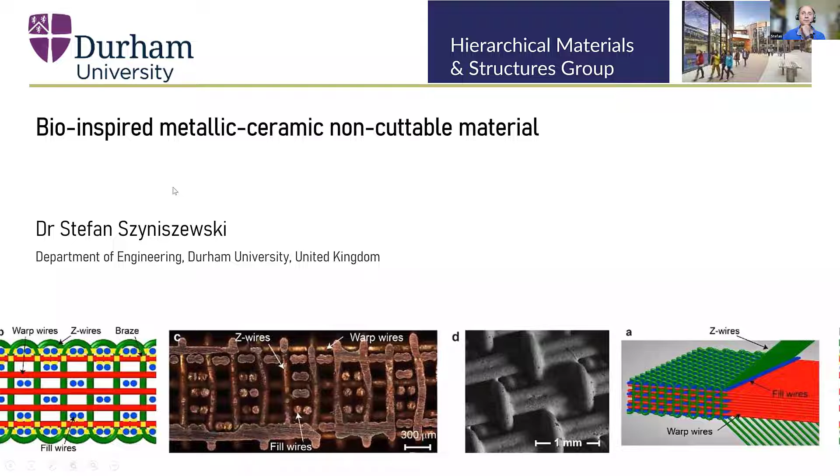Thank you, Claire, for this nice introduction. Thank you for this opportunity to discuss this topic with you and your students and staff. This is the title, and this is the talk I gave at the Institution of Engineering and Technology earlier this year, which explores the links between biological structures and human-made material systems. As Claire said, I am part of the UK Metamaterials Network, and I'm especially interested in the modeling and design. Anastasia Kisil is the lead. She's on maternity leave now, and Bryn Davies is part of the team, and I think he's here also participating.

There are no wrong answers. I hope I'm still connected to the call, I had internet problems before. Yeah, you're fine, Stefan, I can hear you. I don't have any ideas, so I'm not going to venture an opinion. Has anyone else got any thoughts? Cameron, you look willing to say something, but your mic's not working, maybe.

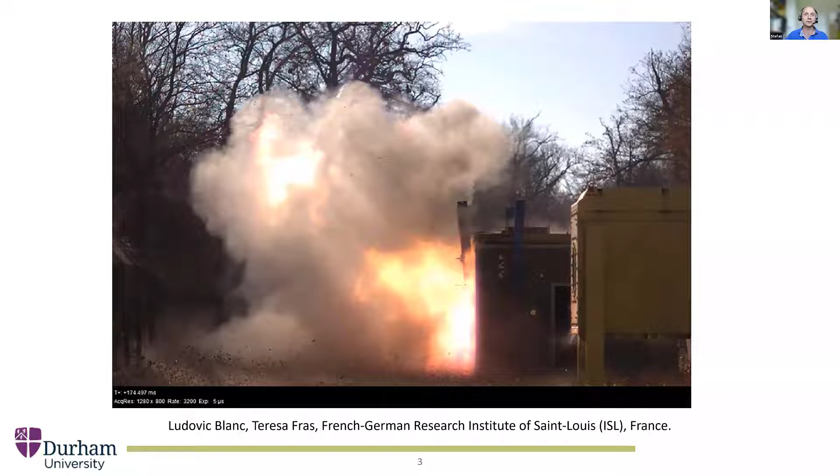In this case, I think when Eiffel was building the tower, there were no measurements of wind loads. So he had to measure the wind loads himself. It's difficult to design a structure if you don't know much about the loading. How do you size your members without knowing the loading in advance? I think that's why it's such a permeable structure. He was trying to really minimize the wind load on it.

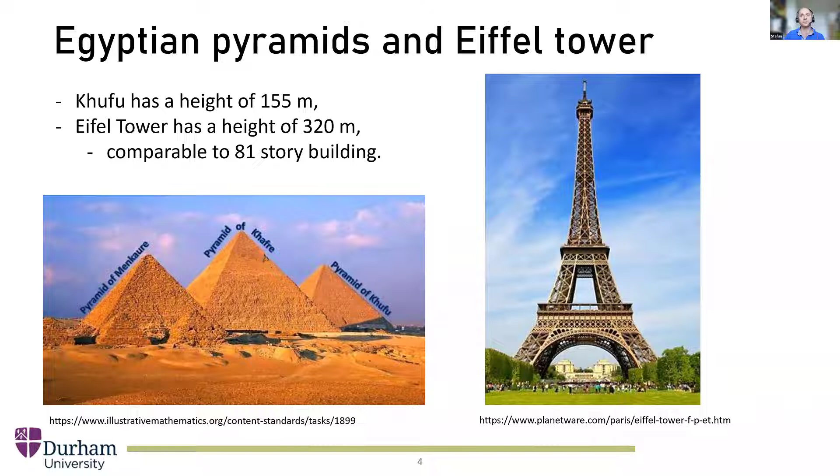And apparently the original design drawings are at the Institution of Engineering and Technology in London. So they are in the archives there. I haven't seen them, but you can access those drawings.

So in my view, hierarchical structures are resource efficient, and maybe potentially we can advance this field by looking at pre-programmed mechanisms to achieve more interactive structures. And of course, this requires advanced mathematical descriptions, maybe parametrization of those structures so we can optimize them. And they might have multiple benefits, like we basically place the material in optimum locations where it's really needed. And we could also take advantage of strength enhancement at smaller length scales.

So as you can see from this description, I'm mostly grounded in mechanical metamaterials. I've had projects with fluid flow, but not with optics. But we'll talk a bit about vibrations and waves.

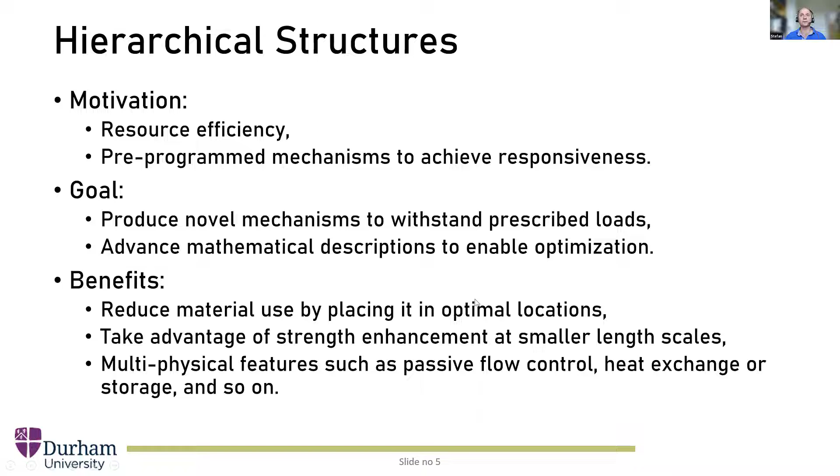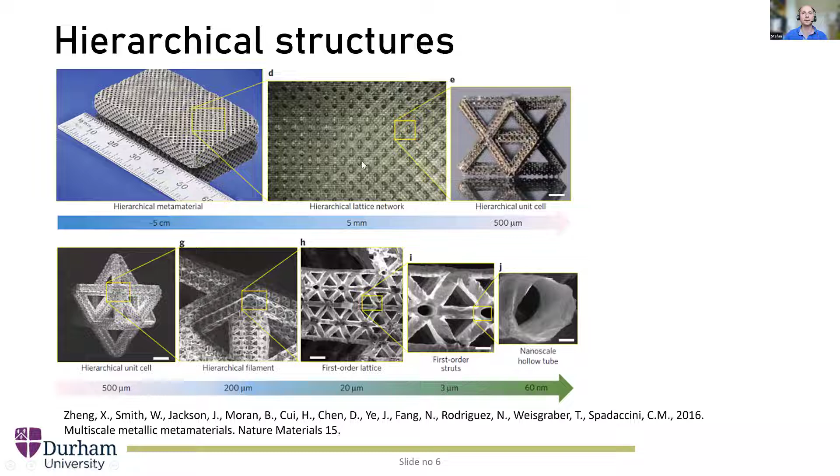The motivation comes from advancements in manufacturing technologies. So this paper is from 2016. That is a group based at MIT, and you can see that they can produce structures from nanometers, so assemble hollow tubes into first-order struts and lattices and hierarchical filaments and unit cells to build hierarchical structures with, here, 5 levels of hierarchy. So this is already happening, this is possible. Maybe it's not cost effective, maybe it's expensive, but it seems that we can have those capabilities, and it seems quite achievable.

If you look at structures in nature, you will see that that's exactly what nature has done over the course of evolution. And even very familiar structures like pomelo peel, which we just chuck in the bin, is quite a complicated hierarchical structure. So this is the peel. If you zoom in, it has some kind of spaces maybe for fluid transportation. But then if you zoom into this porous structure, you will see that it's actually a lattice made of tubes. And each tube is basically a composite material. So it has fibers and matrix.

And the same applies to shells. If you've ever been in France, they eat snails there, and they chuck the shells into the bin as well. But if you look closely at those, they seem to have quite interesting organization of elements. So these are tiles, and they are interlaid with soft material. And actually those tiles resemble ballistic ceramic tiles. Some ballistic armors are oftentimes made of this kind of hexagonal tiles. And here the motivation is that interlaying rigid material with soft layers will cause crack arrest or deflection, making it difficult for the crack to propagate.

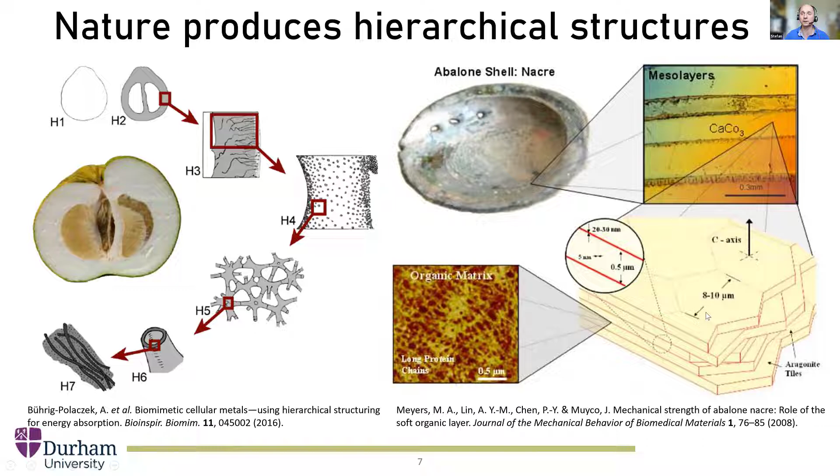So the shell is quite strong, quite tough, even though it's limited by the properties of the building blocks, because that's the main limitation in nature, that nature has only a few kinds of building blocks like chitin and so on. So it needs to be very clever to achieve the best properties, because it cannot just go for the stronger or stiffer base material.

And on those levels of hierarchy, there is a group of Professor Meyers in California, and he has devoted a few decades of his research career, built a nice group of students, and he looks into various structures in nature. An example of his paper is, I think he was comparing feathers of birds across different sizes, all the way from those very tiny colibri birds, hummingbirds, to condors, which are quite large. And he found that there is a common characteristic length scale at some point. But I'm not showing this here.

So one of his explorations was this investigation of levels of hierarchy. If you think of those levels of hierarchy, it's like Russian dolls, where you have a doll inside a doll inside a doll and so on. So if this is the first level, each tile is made of smaller tiles and soft material, and then the smaller tile is made of even smaller ones and so on.

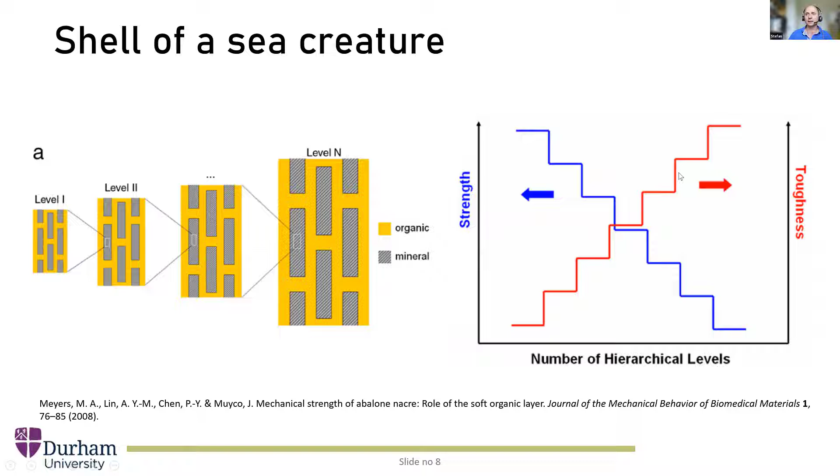So his observation was this: as level of hierarchies increases, the toughness increases, but the strength drops. So we have more and more kind of porous material, and then it's easier to fail it. But there might be a kind of Pareto front or a trade-off. Maybe his observation was like 4 levels of hierarchy would be a sweet spot where both strength and toughness is good. Because you might have a very strong material, but it shatters under impact, for example, or maybe very tough, flexible material, but it's not very strong. So I think these are interesting kind of investigations.

And if you look at the biological structures like the seashell, yes, it has calcium carbonate, but also chitin molecular chains. And those chains form mineral bridges. There are different types of bridges and connections. And even those chitin fibers, they look a bit like networks of connections. And then you can build mesolayers, and then you look at the sea creature shell, which looks not really that special, but actually those levels of hierarchy are quite incredible.

And what I find interesting there is that these structures have evolved over hundreds of millions of years, a very long time, very many evolutionary cycles to find structures that are very functional. And I feel this is our challenge with human-made materials, that we have so many possibilities, but we cannot wait for 1 billion years to deliver a product to the customer. We only have 6-month cycles or annual cycles or 3 months. So how do we perform complex designs on such multiple physical domains, levels of hierarchy, in a rational way? I think that's a big challenge.

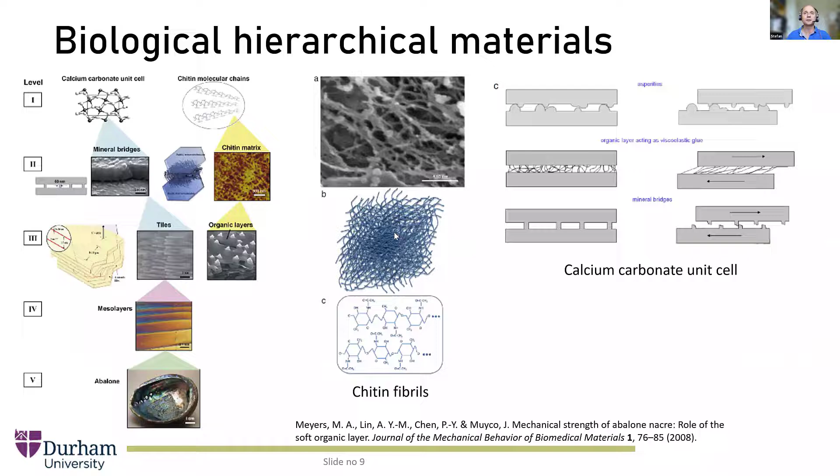And it occurred to me at the time, why don't we try to emulate the abalone structure, so stiff soft organization, using cellular metal and ceramic spheres. And maybe that will work. So it will be simultaneously lightweight, but difficult to breach or to cut.

But the principle here is different. I mean, we need to stop angle grinders. It's not a conventional type of loading. So then I thought that maybe we can use local resonance and vibrations of those spheres. If you look at those, you can say this is mass immersed in a flexible matrix, so it should be susceptible to local resonance. And that might be our resistance mechanism, a dynamic one.

So how do you make those materials? It's a little bit like baking. You mix metallic flour with baking soda, some kind of foaming agent, you mix it, then it's pressed. This pressing ensures that the interfaces are in close contact, and extruded. After extrusion, it looks like a solid bar. You wouldn't tell that this is just compressed powder. And then it goes into the oven and the foaming takes place. The material really expands, so it needs to be in a watertight container.

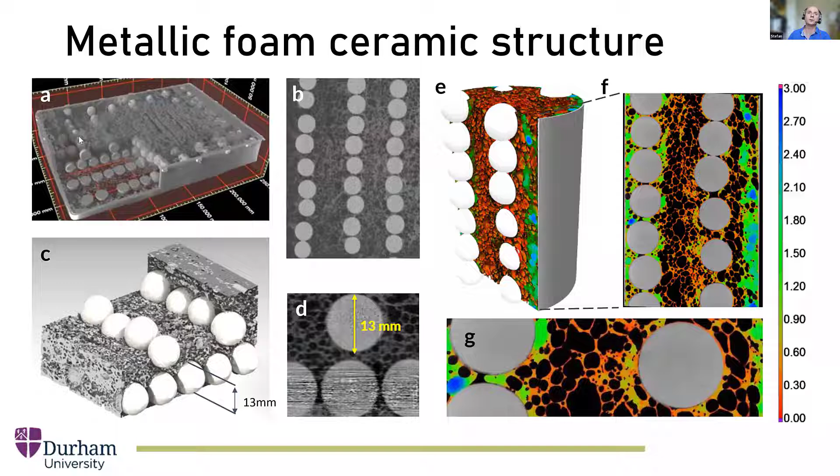And then you end up with the sample. So that's what you end up with. This top left corner shows a CT scan of the manufactured plate. This is a cylinder; this is also a CT scan. So you end up with structures like this, and I think we can produce them in many different ways. 3D printing could also work, with inverse casting and so on, but it would be more expensive probably.

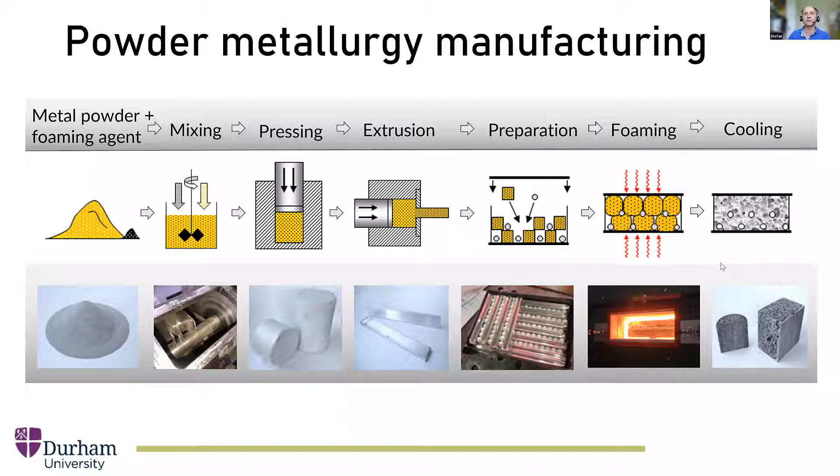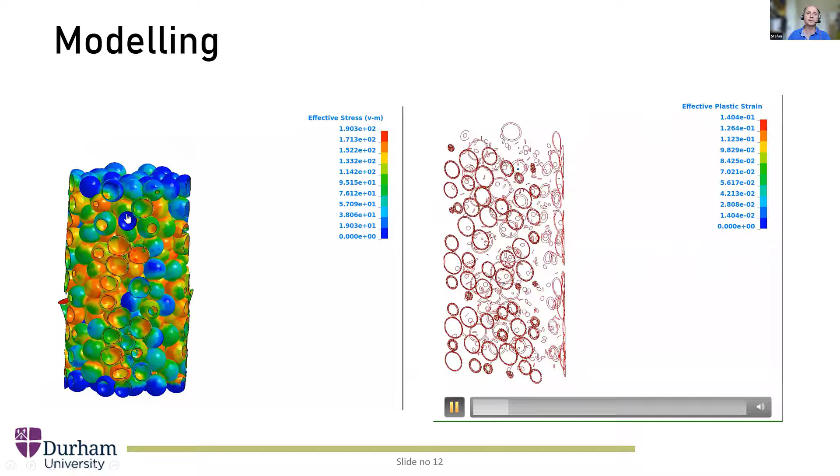So as I said, I'm interested in modeling, and if you think of a hollow sphere foam, even relatively simple problems like compressions are quite challenging computationally. In this case, I used LS-DYNA, and I had to reach for help to developers because there were so many conflicting contacts here. There are maybe tens or hundreds of simultaneous contacts, and they might give conflicting directions for the iterations, because the contact says, let's push this out, but then you push the sphere into another contact plane, and they can get stuck in endless cycles there.

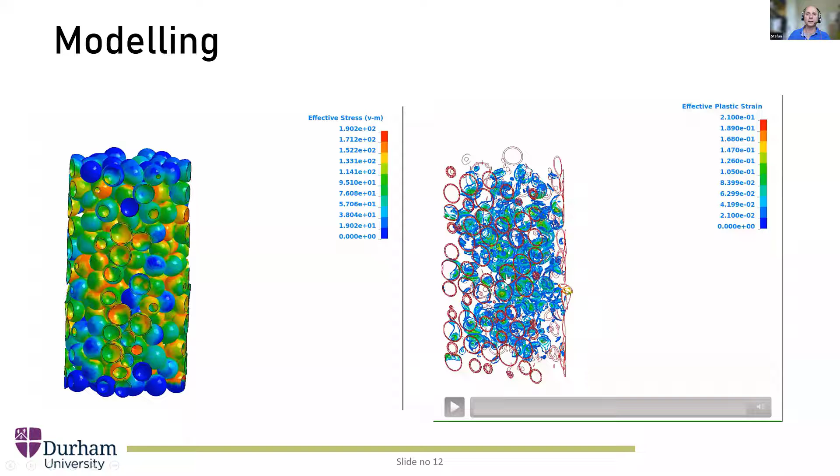So that's an example of a real-life kind of test which is causing numerical problems, but finally it's possible to resolve it. So the advantage of this is that if we do such models or simulations, we can maybe get a good, decent comparison with experimental data. So you can see comparisons; they are not great, but not bad.

And then by looking at those sections, it becomes apparent that it's actually buckling of spherical shells that governs the mechanical behavior of such kind of sintered foams. And the buckling capacity depends on the radius of the shell, its thickness, and parameters. So then we can draw some kind of conclusions.

And in this case, we are looking at sensitivity to temperature. So what happens if you heat it up? It turns out that the buckling is controlled by the yield stress because we are in the plastic buckling regime. So the temperature dependency is a function of yield stress, not the Young modulus. But for a very thin shell, it could be controlled by elastic buckling, and then it would be reversible, like a sponge that bounces back, but those shells would need to be very thin.

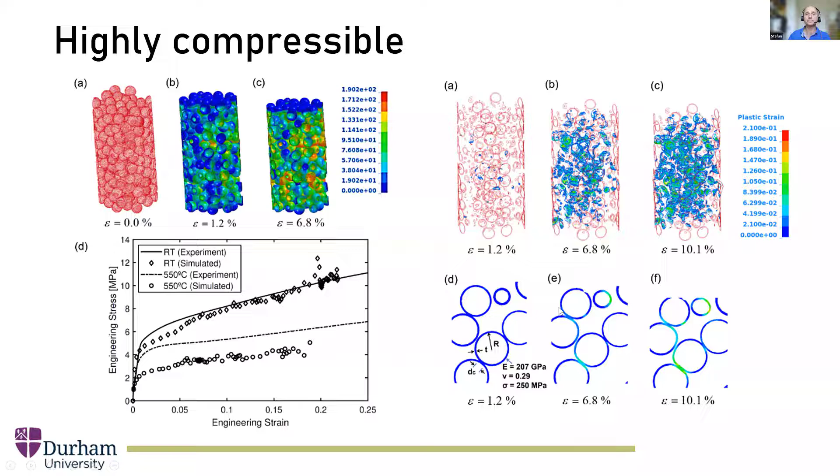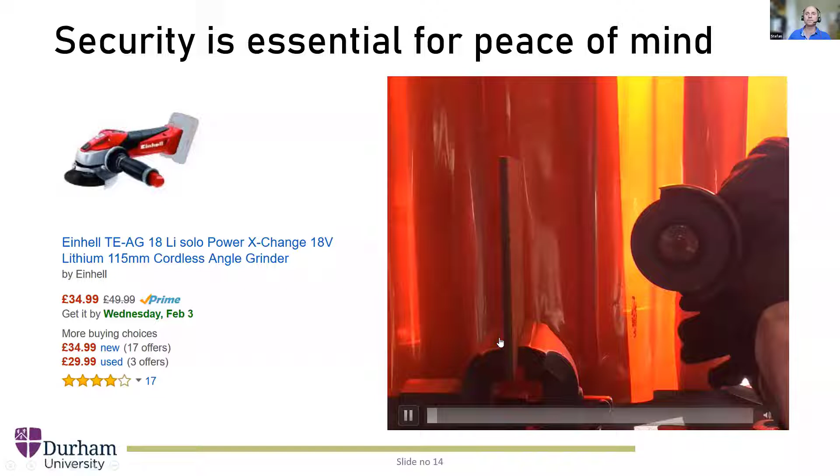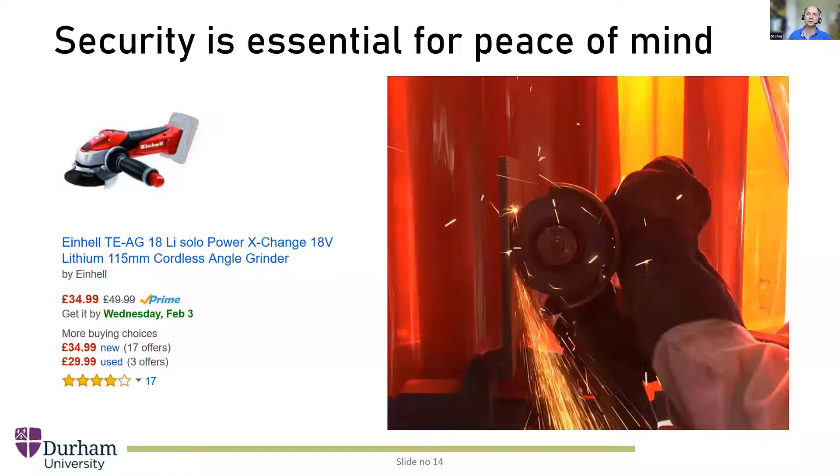Okay, so returning our attention to the primary motivation that was given by the Home Office. They said, look, those items can be purchased for 30 pounds, and this is what happens when you try to cut armor plate. So this is, I think, 12mm armor plate that is used in tanks. So it will stop handguns and machine gun bullets.

Yes, the video is a bit choppy. Maybe it's because I'm streaming it.

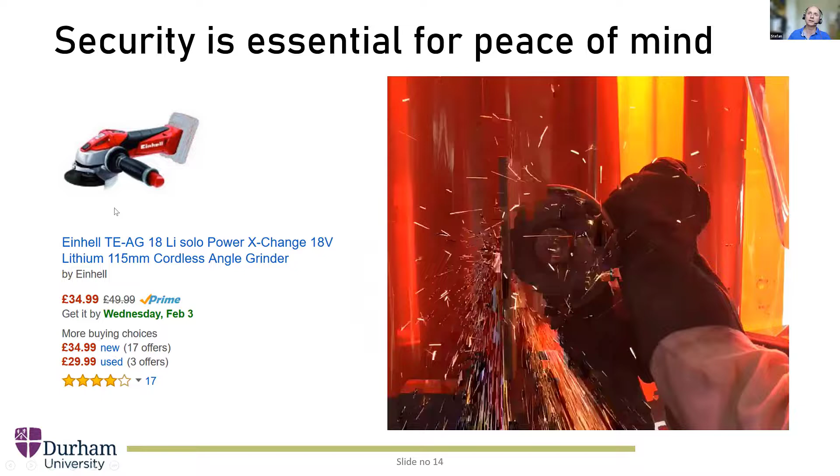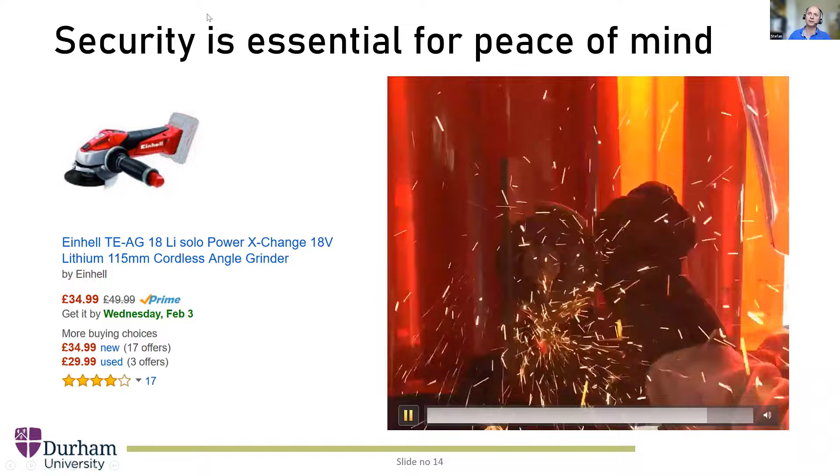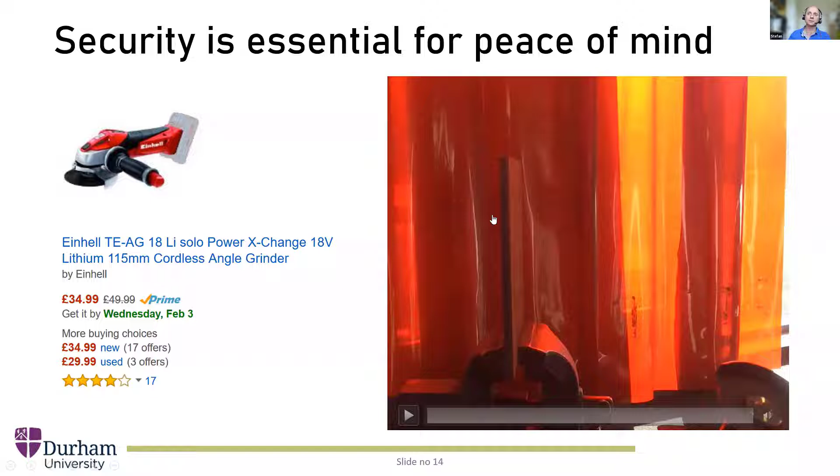But you can see that you can cut through this probably in a minute or so. Now the sparks are coming on both sides. And if I stop it here, the blade went through. It's a bit grainy video, but I hope you trust me that you can cut steel. It takes some time, but it's not such a long time. If you want to cut an opening, maybe you need a few minutes and it can be done.

And the motivation is, this is an example from one company that approached us later on. So these are bike sheds in London, in Camden. And you can see that a criminal can come with an angle grinder. They just cut this plate, they open it, and they steal 8 bikes, for example. So that's the cut lock. So they were looking for a solution for this problem.

So this is our plate, which has a cellular metal and ceramic spheres. This test was done at the Center for Applied Science and Technology in Langhurst. Sadly enough, I think the center is closed now due to budget cuts, or consolidated with another center.

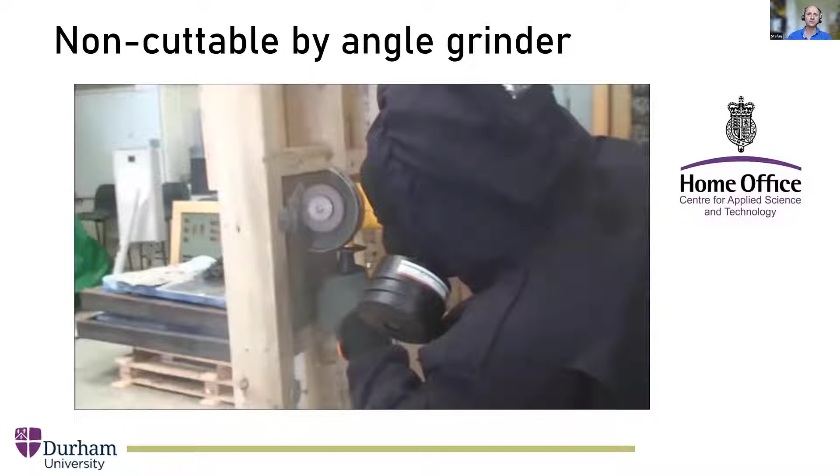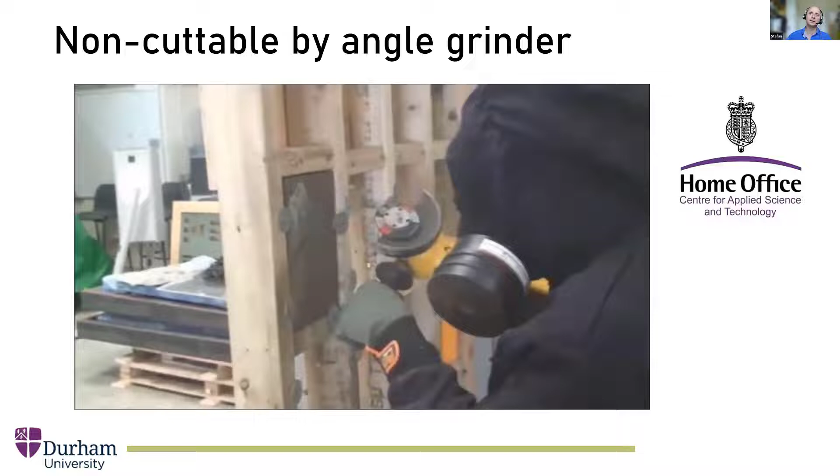But if you look at this video, you will see that there is initial penetration, but then things stop and the blade is gone. The disc is no more. Hopefully you have seen that the radius shrank. And from the big disc, there is no disc. So how does it work?

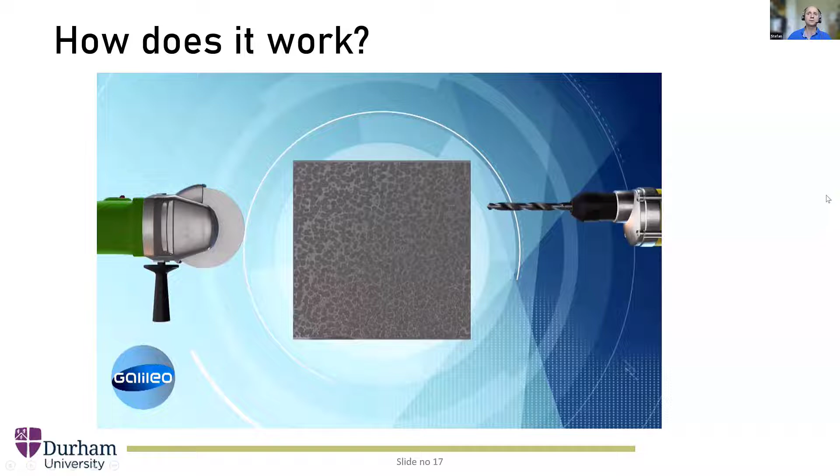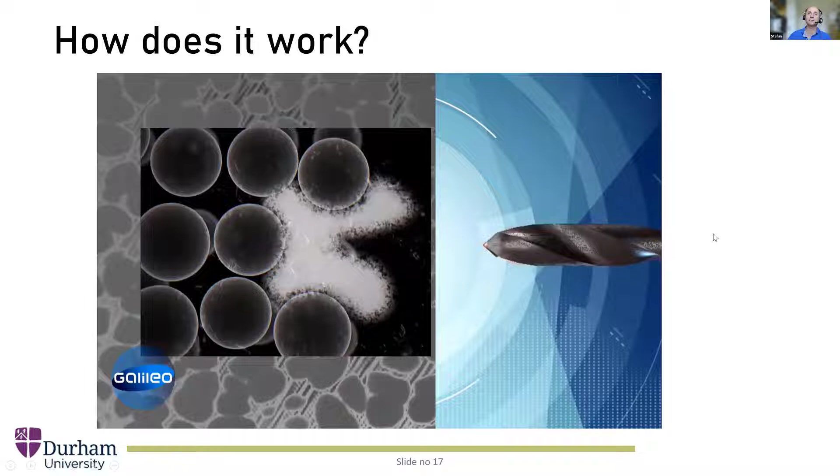So this is the principle: when you try to cut it, basically the spheres start vibrating, but also they will be partially ground. So we end up with this vibrational interface, which is a bit like a sandpaper. So basically vibrating sandpaper.

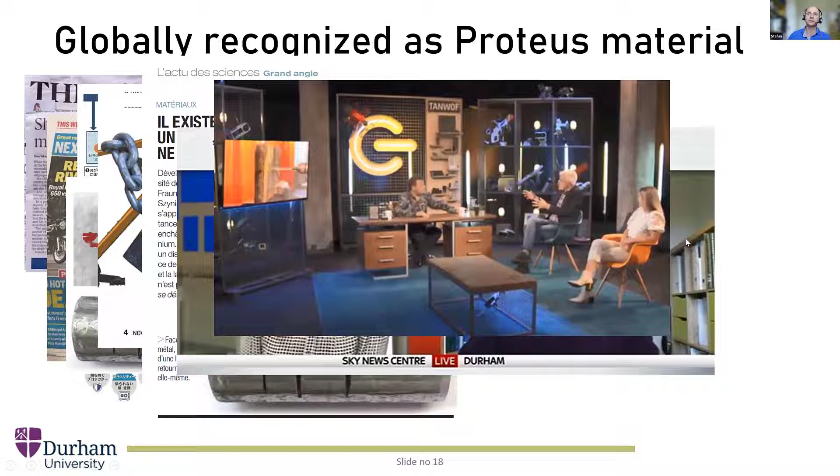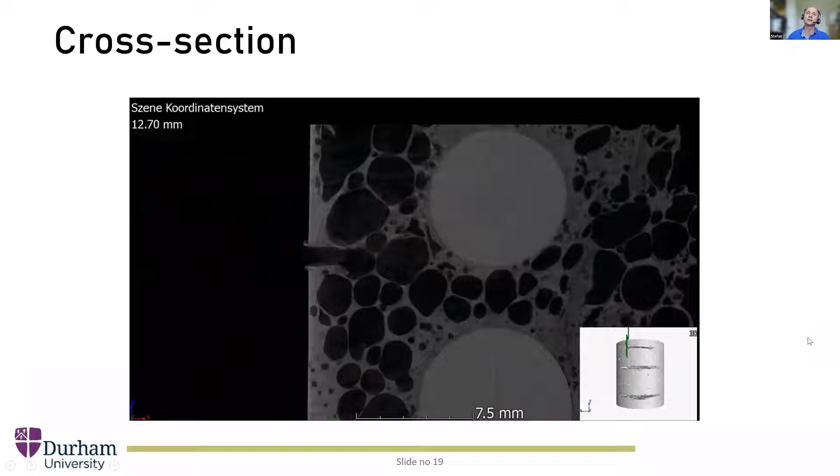If you look at the cross section, the CT scans, what happens? You see there is partial penetration, but then it gets stuck because once it engages the sphere, the vibrations kick in. So here we were going for the material, and this vibrational mechanism is the key resistance mechanism. So it's not the hardness of the spheres. So why does it work?

The interesting thing is that the disks naturally vibrate. If you have a rotating disk, there are eigenmodes of the disk, and the waves, I will tell you more about this in a moment, are standing waves, and those modes are quite interesting. And also we have natural frequencies of our material as well. So there is a natural frequency of the sphere in the soft medium, and if you have more of them, there will be some interactions there.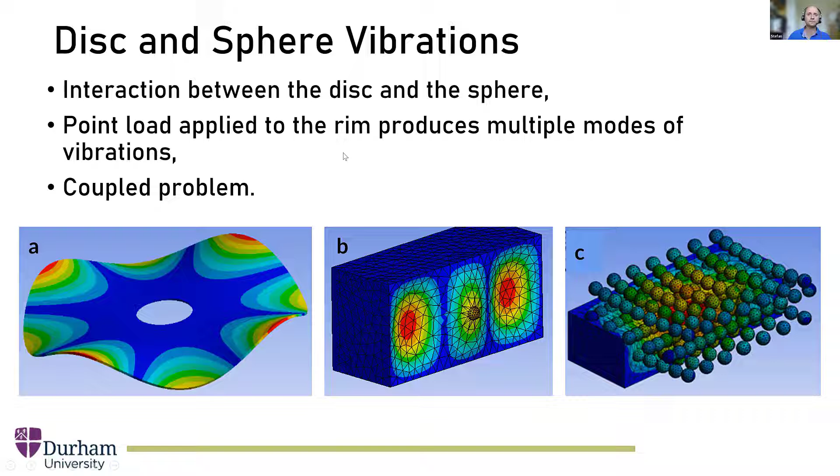And it's a coupled problem probably. So if you go back, the original work on the vibrations in disks, rotating disk, was done by Wilfred Campbell, who was an engineer working for General Electric. He was developing the steam turbine disks, and I think he was the person who made them successful as a company.

But unfortunately, he didn't live long enough to respond to reviewers' comments. So when you read the original article, it says: owing to Mr. Campbell's untimely death, very shortly after the presentation of this paper, the closure is prepared entirely by Messrs. Kimball and Robinson, but includes the remarks made by Mr. Campbell at the meeting in answer to Mr. DeWolf. The short time allowed at the meeting prevented the author from replying in person to any other discussion at the time. Unfortunately, he seems to have died in some kind of accident, so was not able to respond to all reviewer comments.

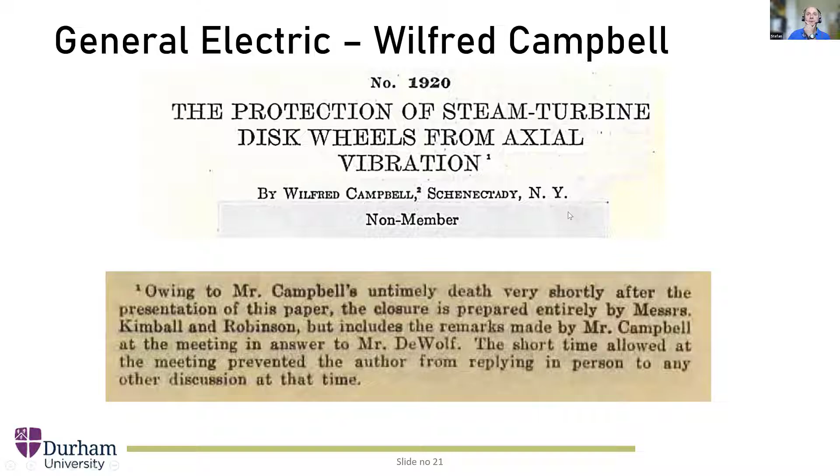But I think personally, I would credit him for the success of General Electric, now a huge corporation, multi-billion, because basically he solved the problem of failing rotating disks. So what he recognized was, and I think he was very ingenious.

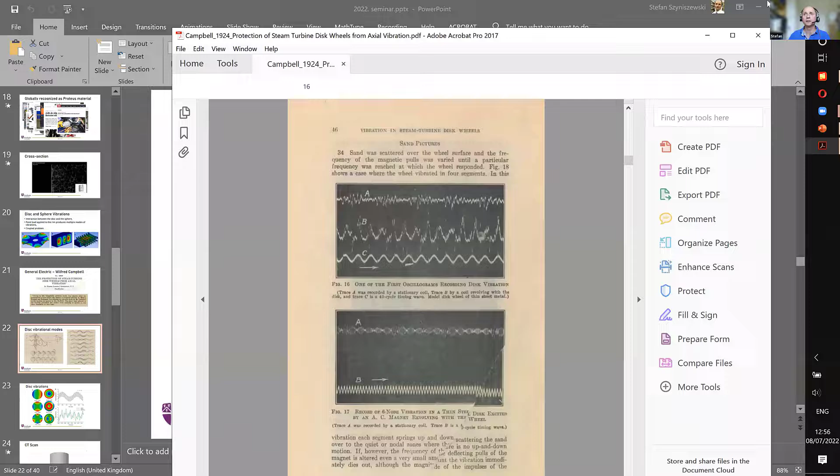It was not easy to find the original paper he published. I think it was 1920 something, 24. Very few manuscripts left. I had to get a book from the University of Cambridge because my wife used to work there at the time. But it's a fascinating article. It's about 60 pages of very rigorous work and incredible inventiveness.

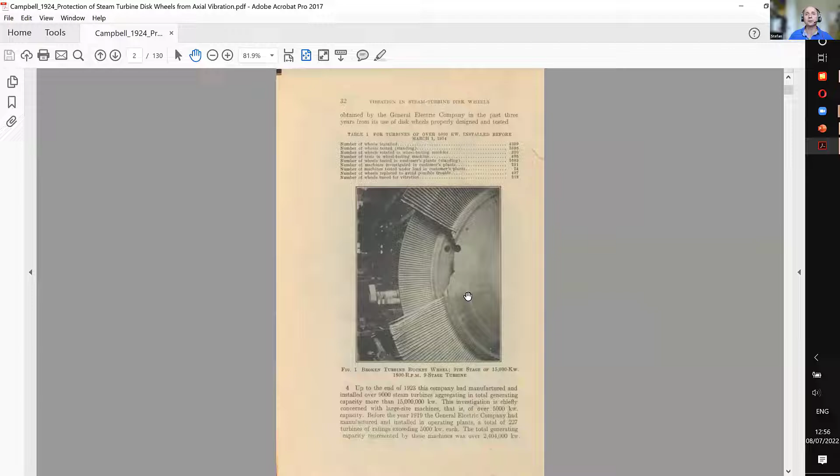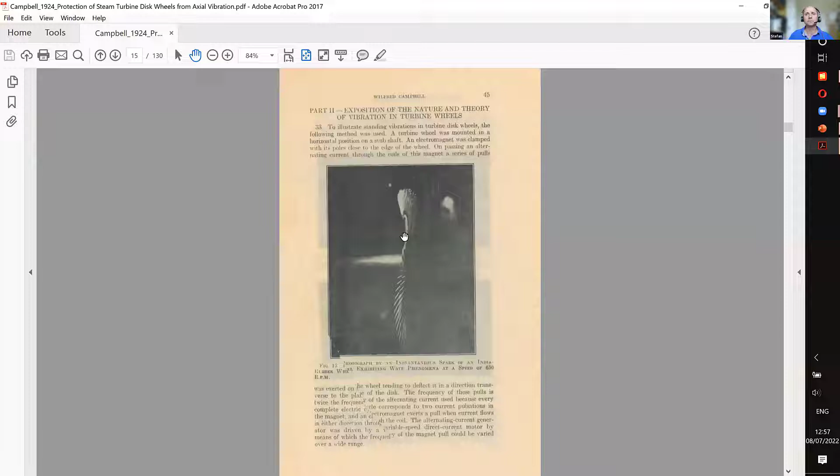So if you look at the article, this is the failure of steam turbines, because basically the way they were testing them, they would look for natural modes by having sand, pouring sand on it and then vibrating it. And once you reach some natural frequency, you will see there is a resonance, and the sand will show you what is the shape of the eigenmode.

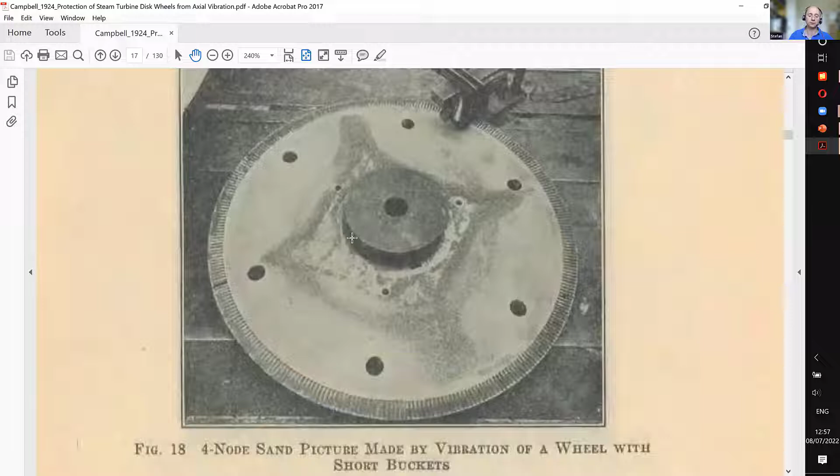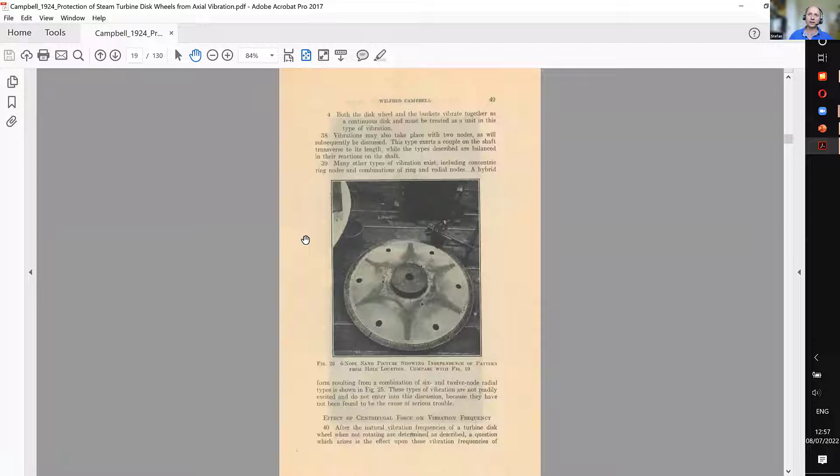But this is the vibrational mode of a stationary disk. When the disk rotates, this mode is not the same frequency. You can see all the modes, very clever, without finite elements, using simple kind of electrical switches and sand.

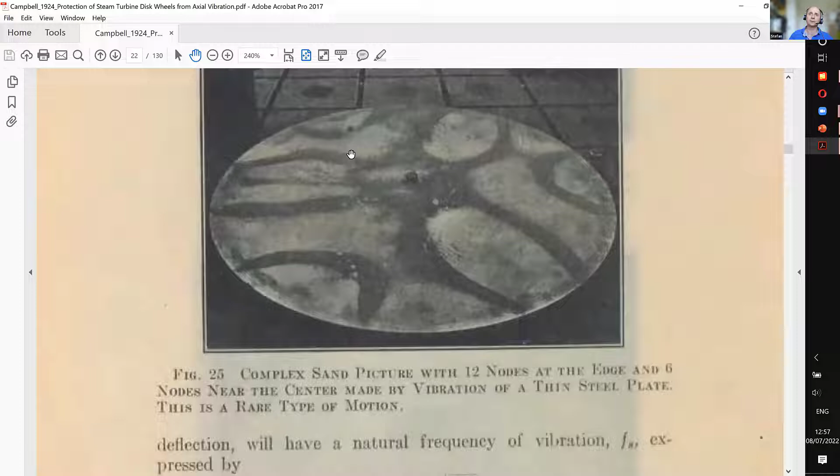And these are more complicated modes. These are interesting, kind of really higher modes. So you could see that. And of course, they were trying to estimate those modes. But what he has realized is that actually those modes consist of traveling waves, which I find quite fascinating.

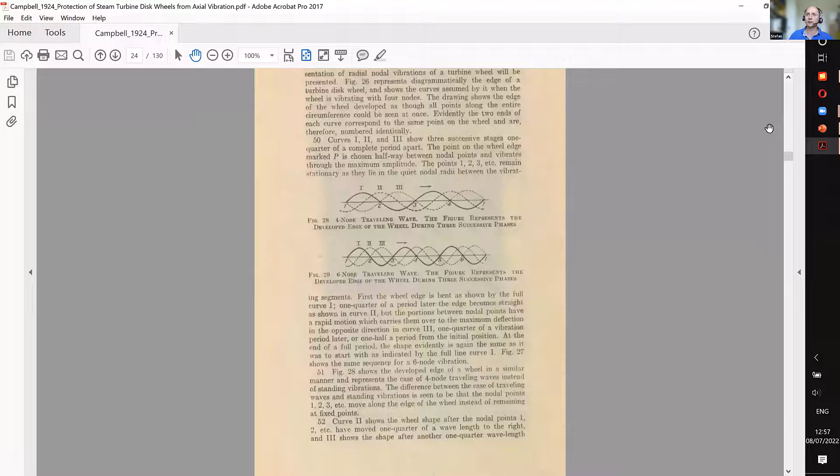So if you look at the disk, there are two waves that travel in the opposite direction. One wave is traveling with the rotation and the other wave is traveling against the rotation of the disk. And they overlap. So this is like his sketches of how the waves overlap, and they form a standing wave because they move in the opposite directions.

So if you are sitting on the disk, like on a merry-go-round, you will see a standing wave. But if you are an external observer, you will see two waves. You will actually be able to record that one wave is faster because it's rotating with the disk, and the other wave is slower because it's moving against the rotation of the disk.

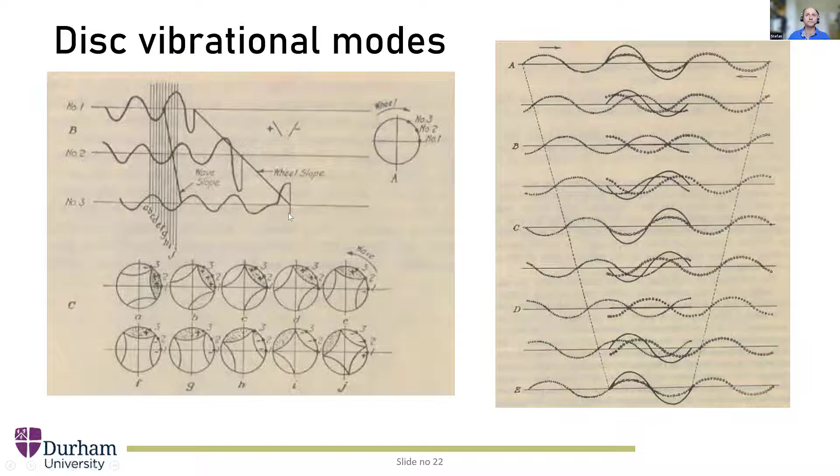So just to reinforce this message, these are kind of the stationary modes, and there are two types of modes, radial modes. On the right hand side there are radial modes, but there are also those modes that go around the circumference. And I think they introduced notation at the time, that there are two numbers. So if this is 2, it means that it's like a second mode. There are two lines that can divide the waves. And if S is equal to 1, it means that there is one wave along the radius.

So it's kind of like a polar system of coordinates, where the waves could have waveforms along the radius or along the angle of rotation. And there could be combinations, like this N1, S2, meaning there's only one line dividing it—one wave going around the circumference, but this wave is broken into something like a sine wave from the center of the disk.

The opening will affect the waves as well. If you cut a bigger opening, it will have an effect on those waves. But the interesting thing is that if you look at multiple waves activated at the same time, the signal becomes a little bit chaotic.

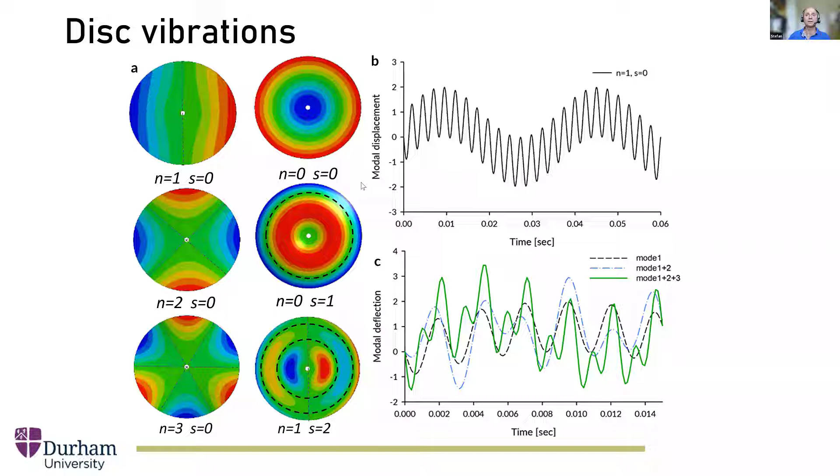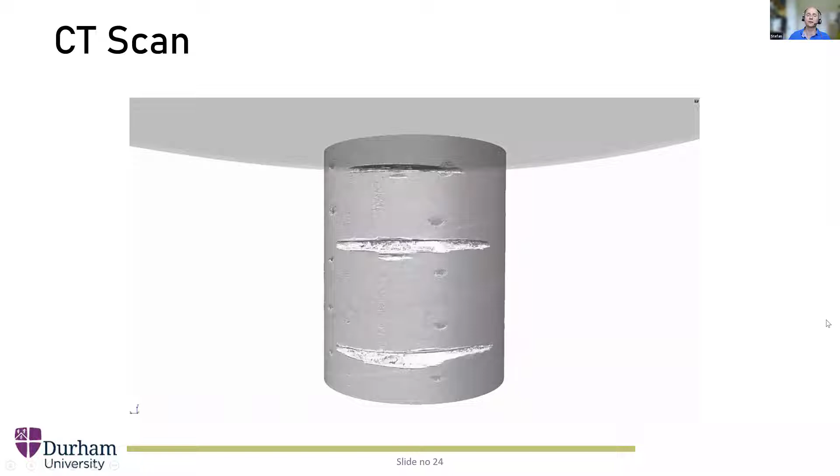So this is a CT scan that shows what might happen when the disk tries to cut the material. That's the disk, and that's a cylindrical specimen we used—we needed a cylindrical specimen to be able to do a proper CT scan.

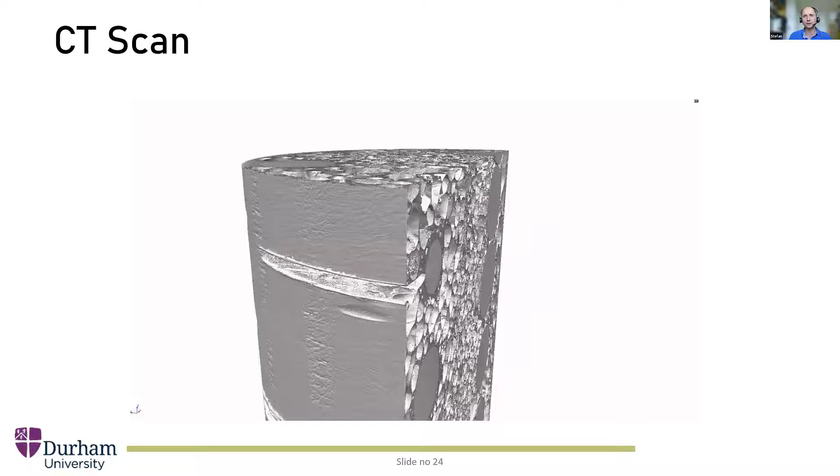But basically, when the disk encounters the sphere, we start activating all those natural frequencies because it's like an intermittent contact—basically hitting it. And those waves that travel around will face an obstacle, so the traveling waves will be disrupted. It's like a wave breaker in their way, disrupting these waves traveling back and forth.

So there is definitely a highly vibrational interface there. The energy is supplied by the disk itself, and now this vibrational interface is like sandpaper, which is grinding the disk.

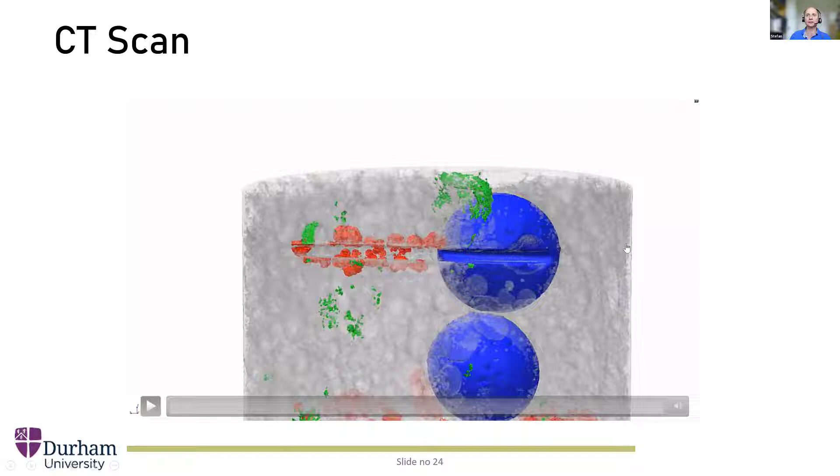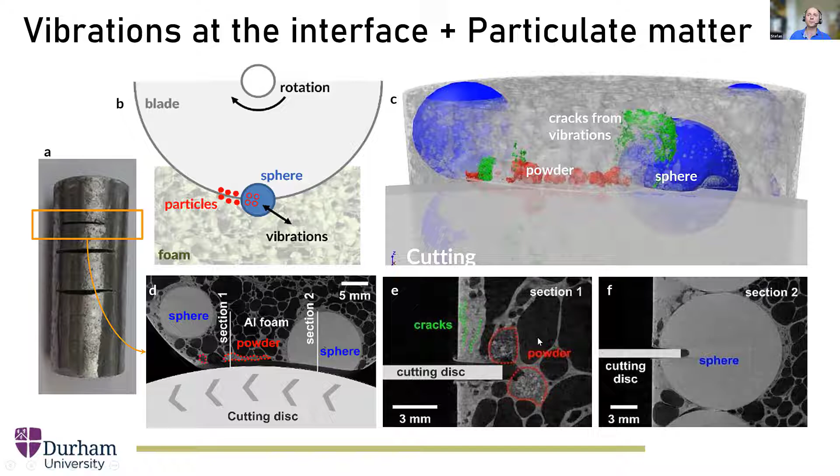So why is the sandpaper important? This is like a schematic that we cut. It goes into vibrations, and the waves are there no matter what. The waves face an obstacle, and we have traces of the powder.

So a lot of kind of—that's an interesting image. We used low-cost ceramic material because we were short on funding, we had very little budget, but it was a good choice in the end because it promoted this fragmentation into particles, making an even more abrasive interface.

And there's another effect—you may see sandbags in war zones because particulate matter becomes very stiff at a high rate of loading. So if you load particles at very fast speed, there are repulsive forces at the interfaces which make the material very strong or hard to pierce.

If you apply loading very slowly, it's not that resistant. That's why you see gravel or sandbags, because they are quite effective for fast-moving projectiles. So the faster this interface, the harder it also becomes.

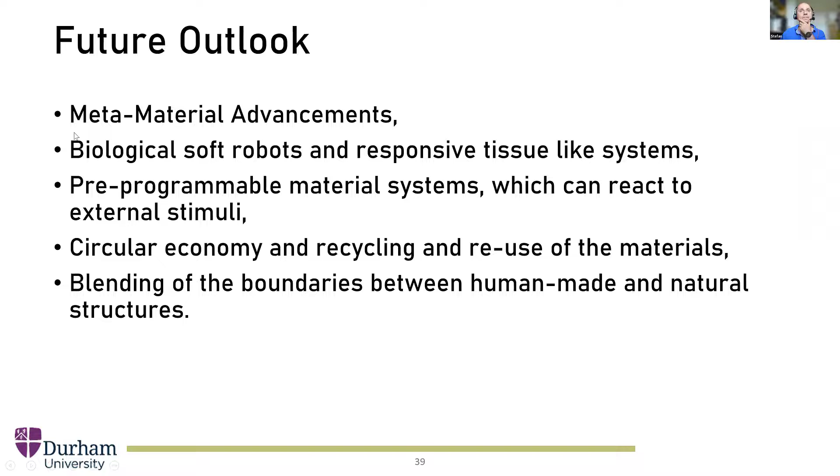There is a question in the chat, and I will now switch to questions. Thanks, Stefan, for a wonderful talk. It's really interesting, fascinated by this material.